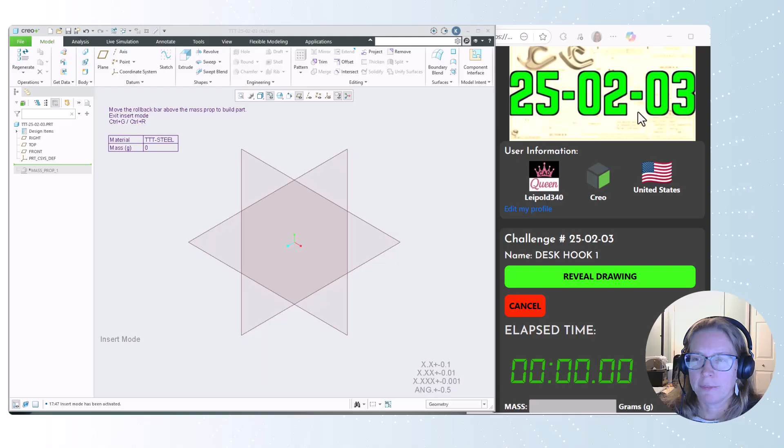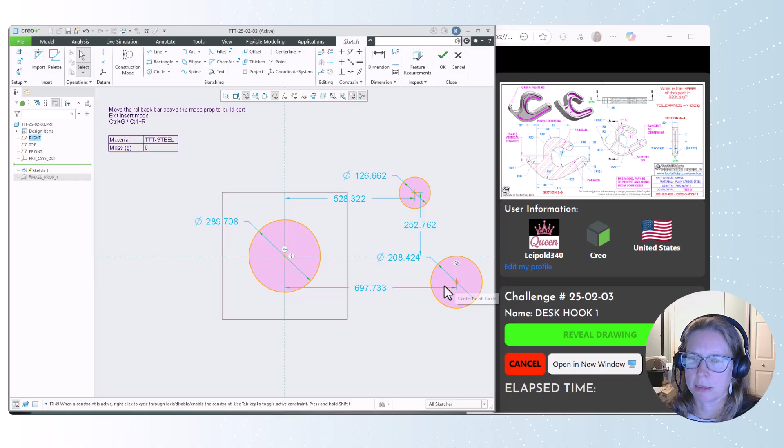This one's got a really complex sketch geometry, and we are going to need to work on this sketch. I actually kind of like creating this one with 3 circles first. So 1, 2, 3. And I'm going to grab this dimension here - the 117 is the distance over to the far circle.

All right, that's going to rescale everything. Shift to slide - I'm going to switch this to a radius, that's going to be 12. The height of the one over here is 26.

By the way, this height really kind of helps drive exactly how much of that clamp you can get in here. So if we wanted to make a larger desk hook, this 26 would be the one we could update, and that would make it a wider throw.

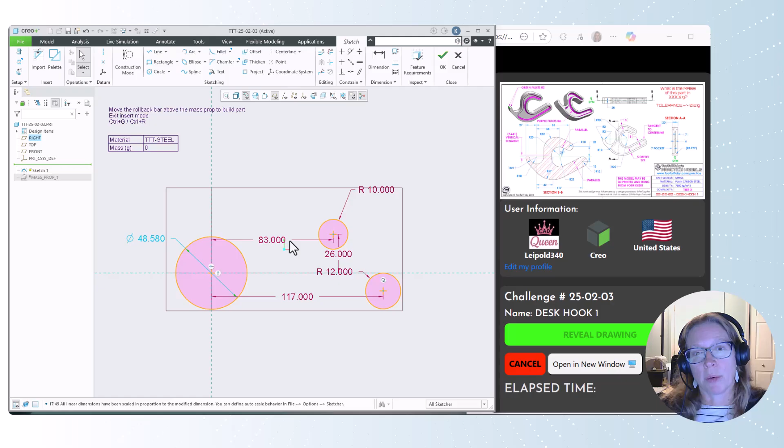Okay, and then this one I want a radius - we'll make that 18. Okay, so there's a lot of tangents in here. We're going to have to kind of play around with this some.

So let's see here, we're going to start coming out. Okay, we're also going to have a line that goes up. I'm going to add some lines that are going to be tangent. This is a pretty complicated sketch, so as we add more stuff, it really wants to make a lot of these constraints.

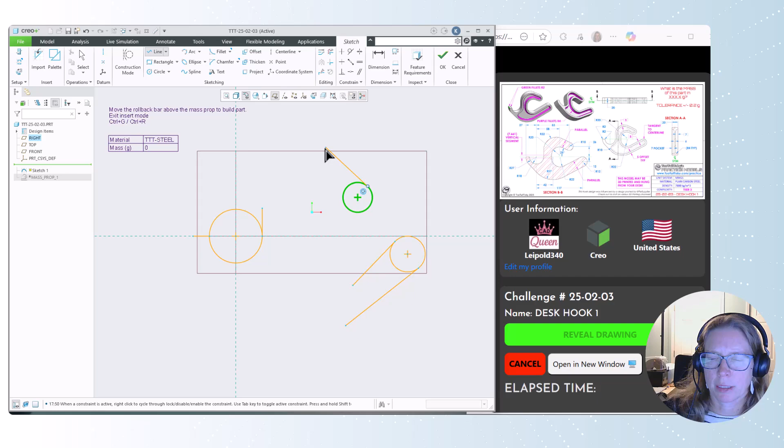So it gets kind of, there's a lot going on. All right, holy cow, that's a lot.

So we're going to do a couple of center end arcs. We're going to add this one over here, and then we're going to add one. It's going to come out here.

So I might just want to, as I'm trying to place this, I didn't want that one. Let's hit escape, let's try this again. As I'm trying to place this one, I might want to hold down shift. Notice how much cleaner it gets.

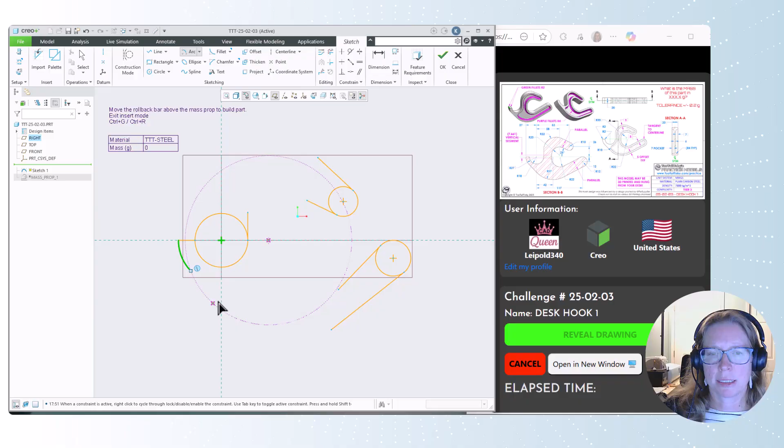As I'm trying to place it, it really wants all those constraints. So I'm going to just hold down shift so I can click and click. Okay.

We also have some 3-point tangent arcs. So I can go from here to here. Oh, undo. Holy cow, okay, let's get some of this cleaned up before we move on.

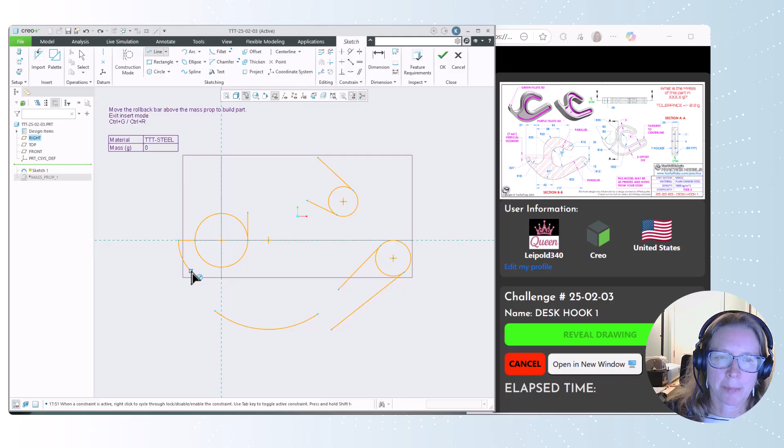All right, I do want these 2 lines to be tangent, and I want these 2 lines to be tangent. I actually want these lines down here to be tangent as well, but I don't know if they would right away, so we'll make them stick together, and then we'll highlight them and make them tangent.

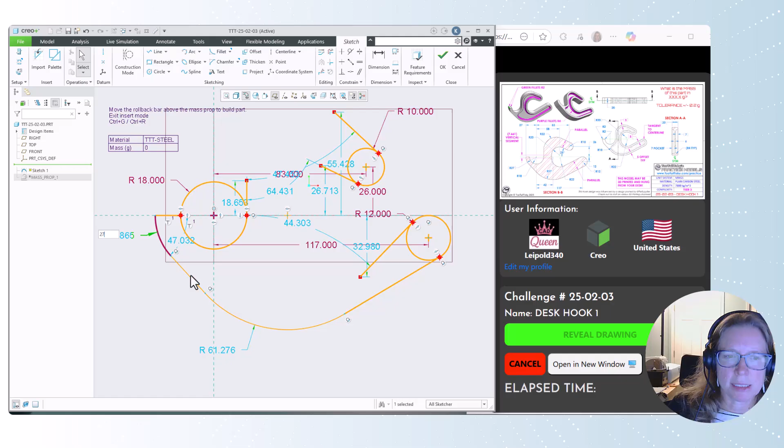All right, this one over here is going to have a radius of 27. This one is a radius of 57. The location of that point, well, let's see here.

Let's make these 2 lines parallel. Okay, and then let's also make these 2 lines parallel. And I'll go ahead and add the 25-degree in here.

So many different ways to go through this. It can be really sort of challenging to put it all together.

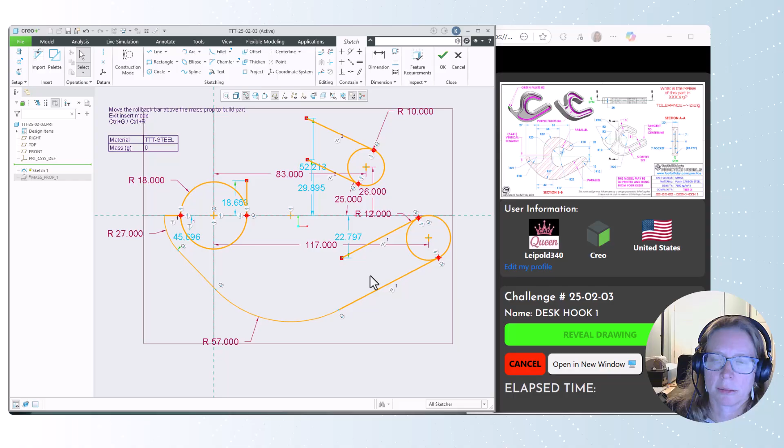All right, so the next thing I'm going to do is use a 3-point tangent arc. So I'm going to come out tangent here and come over to this line for the top. And then I'm going to come out tangent here, and I don't really want any of these, so I'll hold down shift.

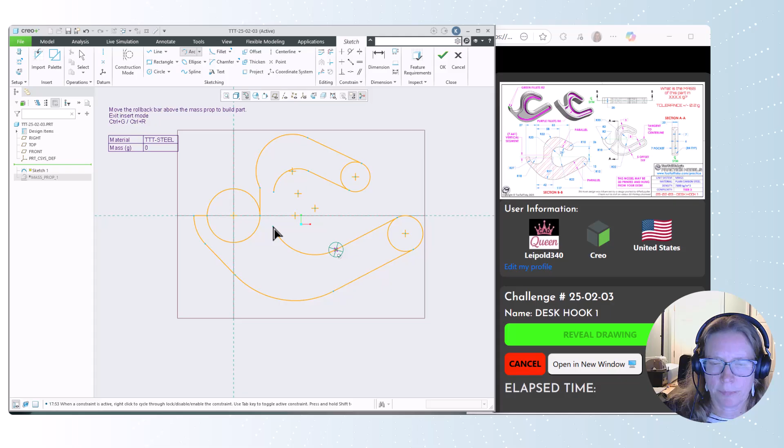Okay, and then I'm going to come out tangent here and hold down shift. And I know this is really awkward looking still, but I promise you, we'll get there.

All right, let's make this line vertical. Let's make that line vertical. Okay, don't need to do that.

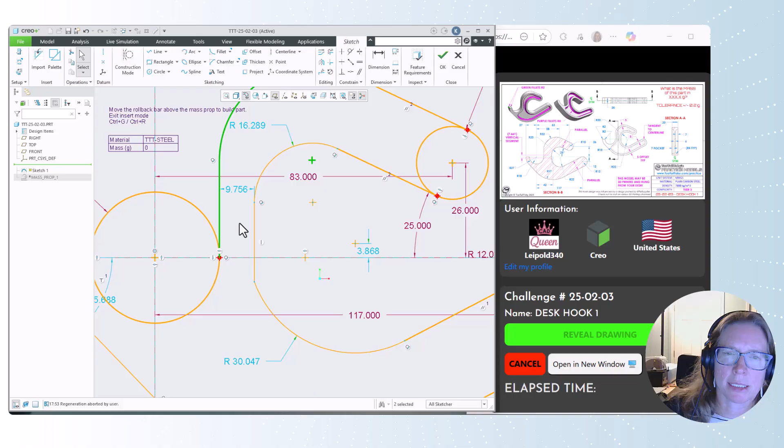Let's make a couple more of these lines tangent. You want to be careful not to get those dimensions when you do that, otherwise it's not going to just pick the geometry - it'll give you more. So we want to kind of be careful what we're picking on there. All right.

All right, so I've got the 117. I need to add, this one's going to be 22. This one's going to be 20. This one's going to be 32. Let's see if that'll do it. Yep. All right, so we're missing 2 dimensions.

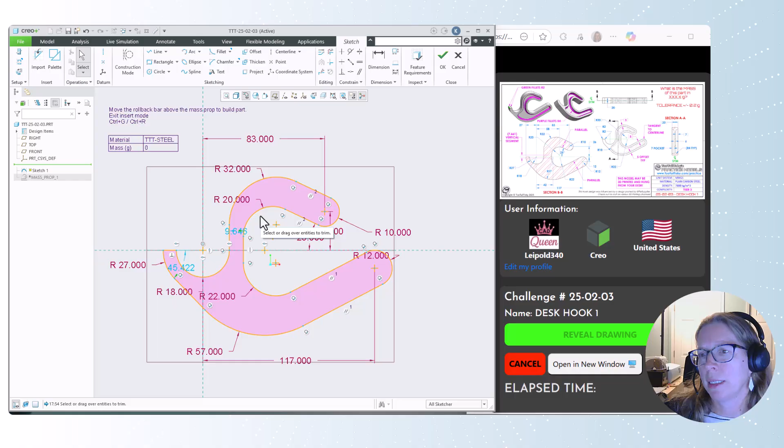We're missing locations of a couple of the center arcs. So this one is going to be 58 from our reference. And this one is going to be 42 from our reference. And that gets rid of all the dimensions.

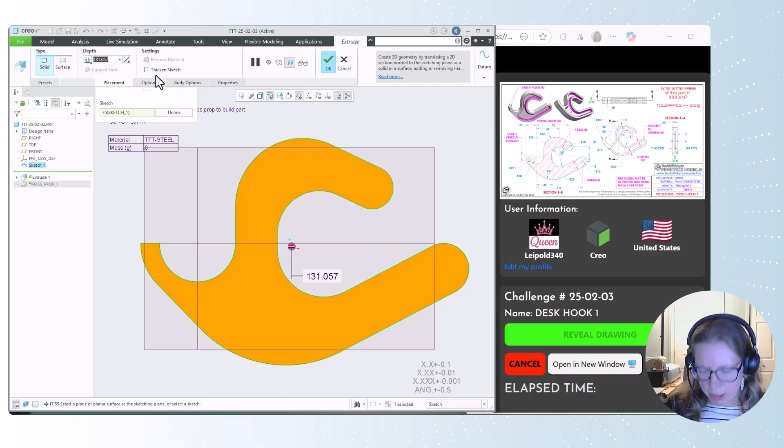Isn't that beautiful? Okay, so we'll extrude that sketch. I'm only going to extrude this for a depth of 10. So the depth is 20, but I'm going to extrude half of it and then mirror it. There's a couple of Creo tools I want to demonstrate.

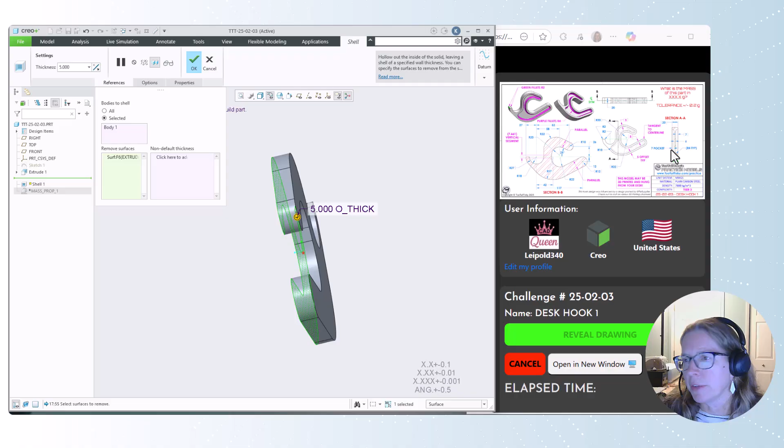One of them is the shell tool. And with the shell tool, I'm going to open up this front face. I'm going to give everything a wall thickness of 5. That's what we see here. But the center of this has a back wall thickness of 3 or 6 in the middle. So I can use the non-default thickness option and set that to a value of 3.

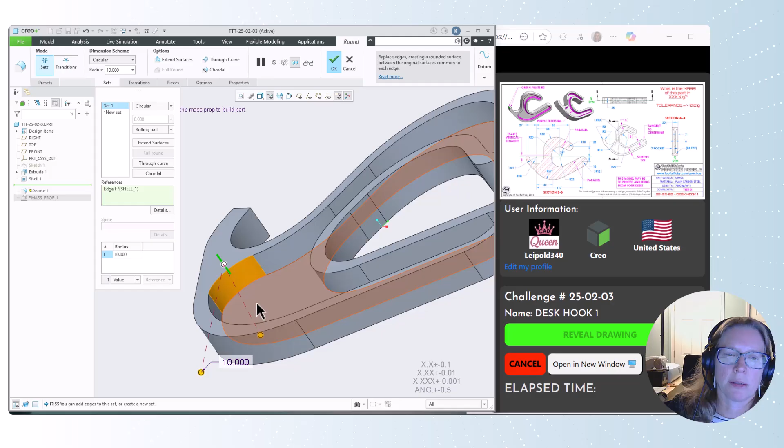Okay, the next tool I'm going to use is the round tool, which sometimes can be frustrating because it allows you to make all these different sets, but here we can really take advantage of it. We're going to make a radius of 10. We'll make another set and we'll pick one of these edges, and that'll be 4, and that'll just follow that tangent loop all the way around. It's really important to get the 10 in before the 4, otherwise it's not going to round at the bottom. And then the last set we'll grab over here, and we'll make those 2 edges too.

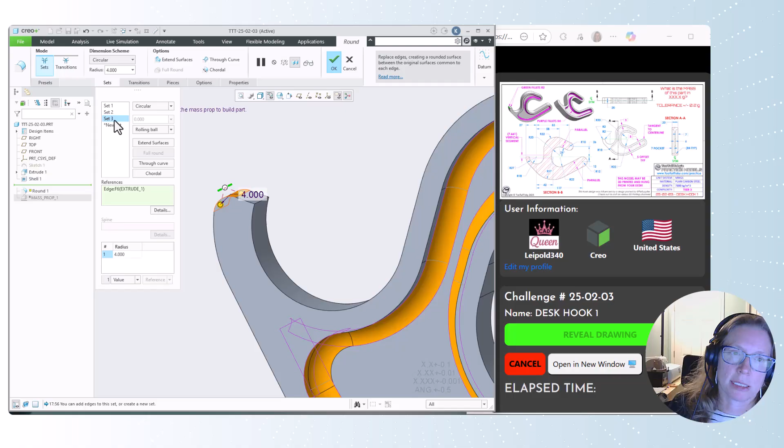So the round tool in Creo with all of those sets can be obnoxious because it doesn't always put multiples based on the same value, right? I'm going to hold down Control to make sure both of those are driven by the 4. Here it really shows the power where you can have multiple edges, multiple rounds added to a single feature.

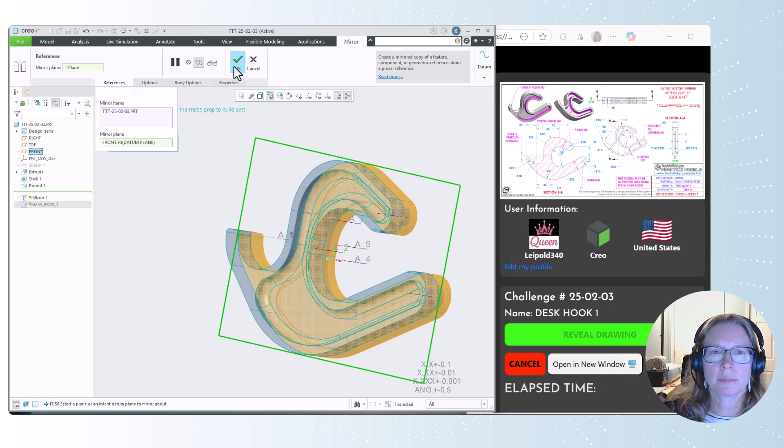All right, and then we're going to take the entire part and mirror that over the front plane. All right, and we've got a nice looking part. Let's hide those tangents. Okay, and let's check our mass.

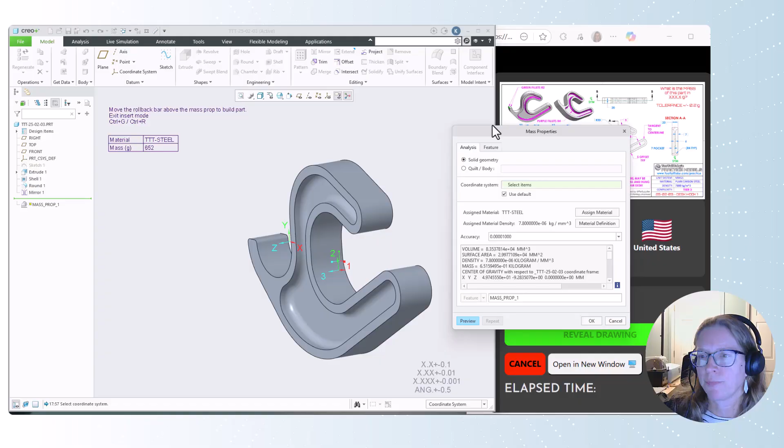Okay, so it says plus or minus 0.2 grams. This is only rounding to 1 gram. So let's edit definition on our mass properties. And we can see here that the mass is 651.2. And there we go.

So that is a really challenging sketch to get right. There's a lot going on there. I do love it for attention to detail and just kind of working through because it does work. I also like it for the non-default thickness on the shell and putting 3 different rounds into one feature.

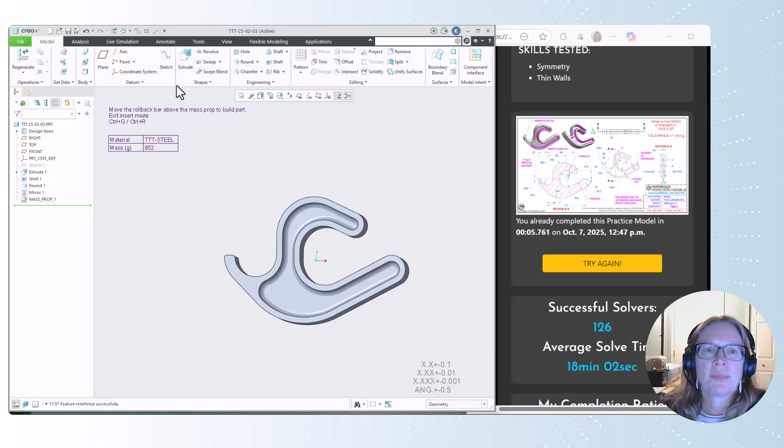I was really curious where the size, like what was this being developed for? Like what size wood would I expect to put this on? So I did want to show that really quick.

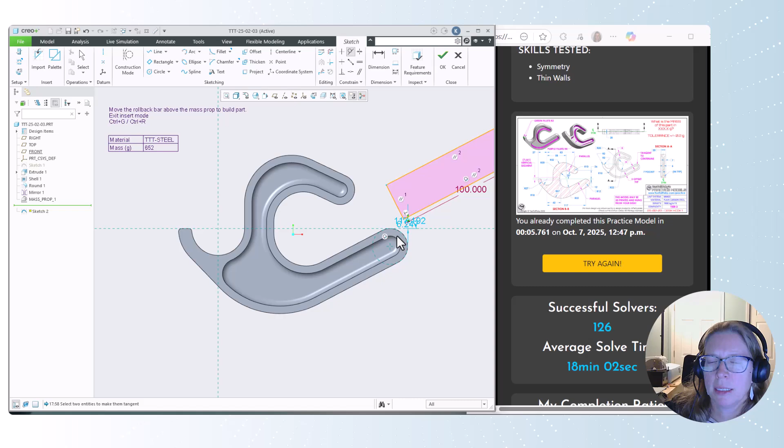Essentially what I did is I came in and I added a slanted rectangle. I gave it a length of 100. And then I set the tangent between the plane, the bottom and the bottom surface, and then the top and the top little hook, and I kind of pulled on it, okay, to see how is this connecting, right? And kind of this is about as big as you can go, right? And if I put a dimension on there,

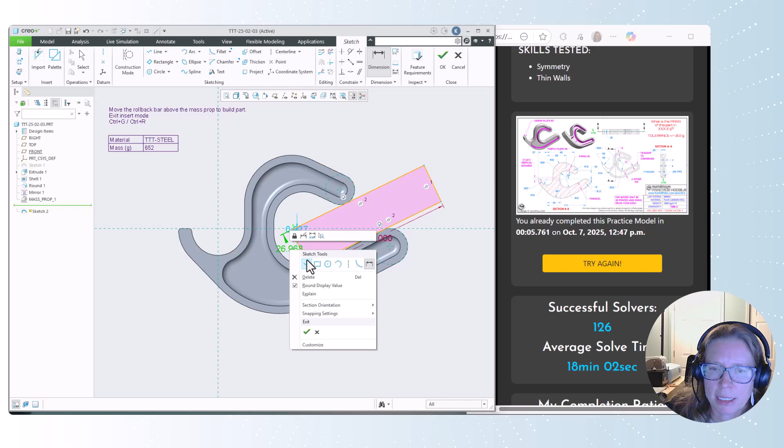that's 26.9, a little more than 1 inch, okay? I'm going to right click and make that, I just want that as a reference dimension. I still want to be able to play with this, but I would just want to see what it modifies to. If you put it on a very small surface, right, you just kind of make essentially the whole thing

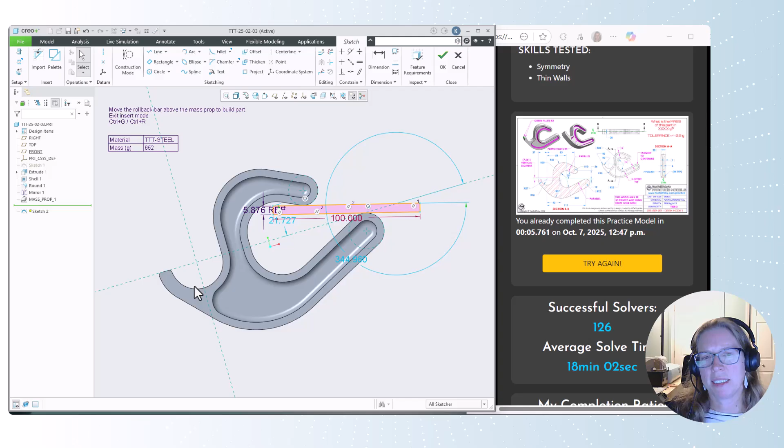would tilt more like this. So the hook would be down a little bit, where if you have the bigger part, which would be flat like this, then your hook is going to tilt up more. Anyway, I thought the part's great. I 3D printed it without any issues.

I had no supports, and even this big area here printed great. Feels very sturdy to me. Big fan of this drawing and this part. Thanks.